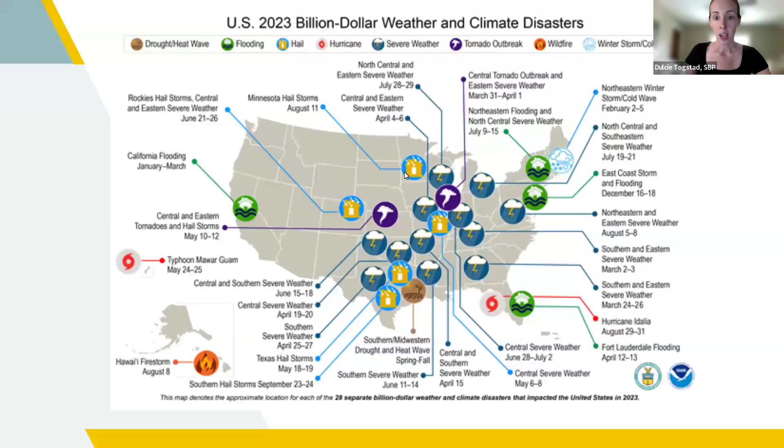I'm going to start by sharing some low cost, low lift tips, and we're going to work our way up as we go through the presentation to tips that are going to be a little bit more involved and more costly considerations. So the first tip is I'm going to arm you with what it takes to inspect your roof.

Inspecting your roof should be something you take action on regularly, say once a year. By regularly inspecting your roof, you are more than likely to catch issues before they actually become larger issues and, in turn, more costly concerns.

So when inspecting your roof, here are some signs of potential issue to look for. The condition of the roof covering: do you have loose shingles? Do you have missing tiles? Do you have rust or discoloration?

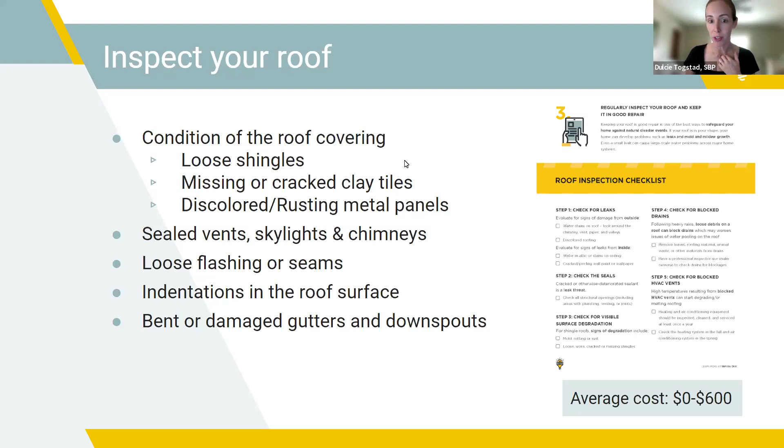Taking a look at your vents, skylights, and chimneys — are those areas of penetration sealed appropriately? Do you have any other loose flashing or seams along the edges of your roofing? Look for indentations or marks on the roof surface where water could seep through, as well as considering your gutters and downspouts in this inspection.

Depending on the elevated height of your home and your individual ability level, this inspection is something you could consider doing on your own, as well as having a professional look at it to assess the condition of it. The cost for that is roughly somewhere between $0 and $600, depending.

SBP has a roof inspection checklist available on our website. I think you should see the link in your chat. That can be used as a resource to help guide you through doing a roof inspection.

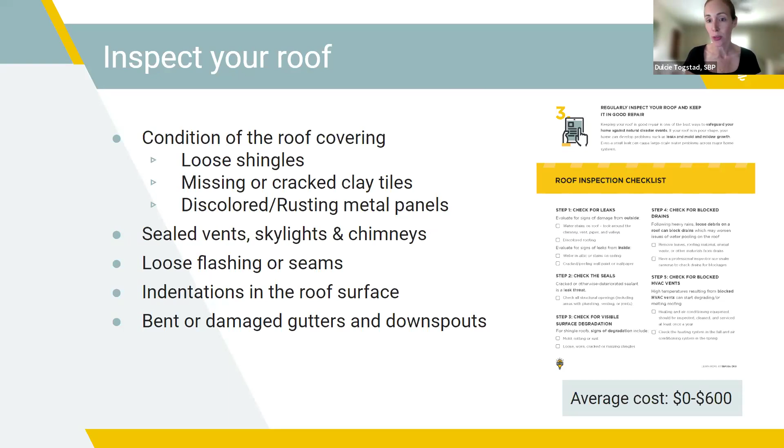If you consider going the route of hiring a professional, make sure you do some due diligence here. Word of mouth is always a good approach to take when hiring a professional, but you still want to make sure that you are diligent in vetting and working with contractors.

So what that means is, all in the spirit of trying to avoid contractor fraud, you want to ensure professionals you're hiring have the appropriate license and insurance and/or are valid to be able to work in whatever state or county you live in.

Take the time to get multiple bids from various professionals to ensure that the pricing seems reasonable. And then read those contracts thoroughly to make sure that you understand it before you sign or offer any payment.

SBP has guides you can use — I believe they're in the chat — as well as short interactive learning modules to guide you through how to avoid contractor fraud.

Moving us to tip number 2: clear limbs and trees from around your roof and home.

Trimming or removing trees is something that should also be done regularly, like inspecting your roof. We should be concerned not only about damaged or dead trees that are very obvious to the eye, but really any tree or limb that could possibly cause harm or damage to your property.

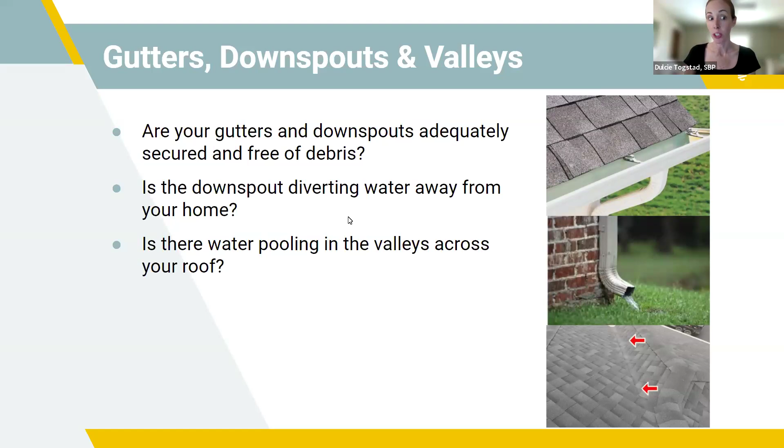The final two tips I'd love for everyone to consider have to do with re-roofing your home. I understand these next two tips may not be actionable for you right now, but when it comes time to put on a new roof, this is knowledge that's going to be handy. Tip number 4 is to consider what options you have for roof types.

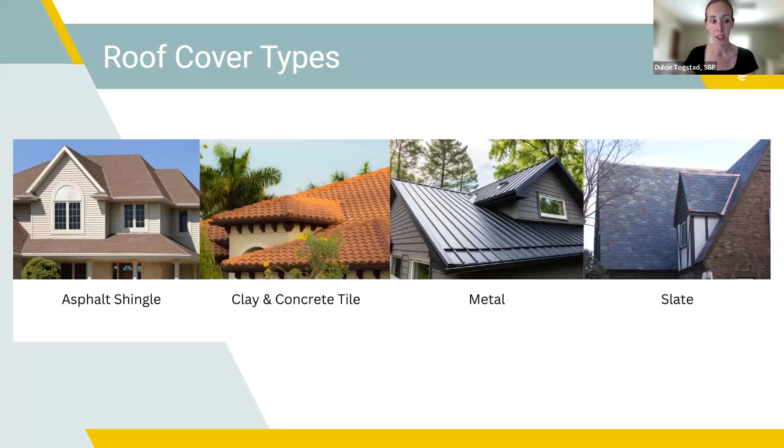If you look around your neighborhood, most of us are going to see asphalt shingles. That's because this type of roof covering is generally the most common around the country, since it's the most affordable, comes in a variety of colors, and is easy to repair. While these shingles typically have a shorter lifespan, they come with an option for a high impact resistant rated shingle, which is valuable - meaning shingles rated as such bring added resiliency in high wind events.

The next roof covering type is clay and concrete tile roofs. While this type of roof covering is a bit more costly and isn't possible on all framing structures, it is extremely durable and requires very, very little maintenance.

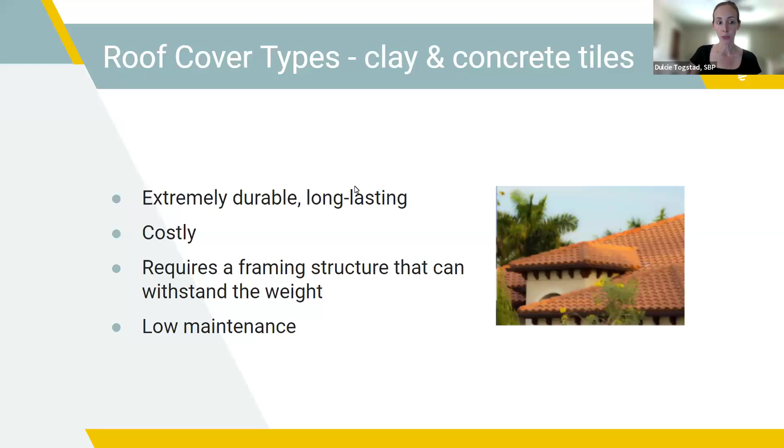The third roof covering is metal roofs. Metal roofs have been growing in popularity because they are the most resilient of all the options and have a very long lifespan. While it's a greater investment than traditional shingles, the investment pays off over time if you consider the longevity of the product, the minimal upkeep needed, and the resiliency, which you sometimes can't put a price tag to.

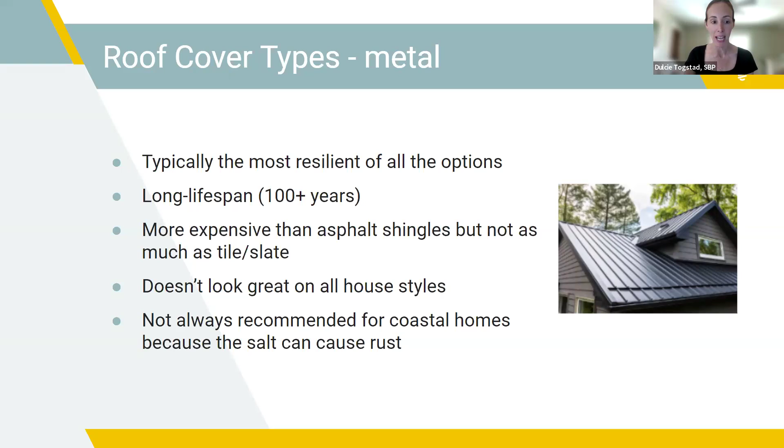The last roof type I want to call out is slate roofs. This is probably the least common we see around the United States, typically due to installation cost barriers, but overall it is a fairly durable material. Ultimately, a well-built, well-maintained roof is what's most important. But if added resilience is important to you, considering different options for roof covering materials is something to keep in mind when taking on a home renovation.

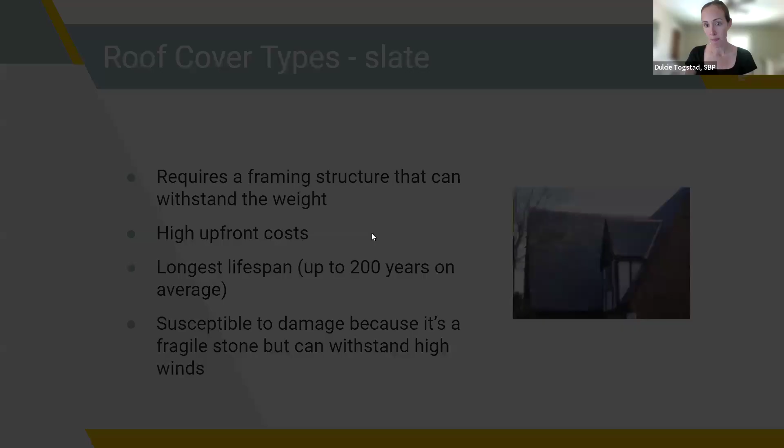The final tip, number 5, that I'll leave you with is to consider re-roofing your home to meet the Institute for Business and Home Safety's Fortified standards. I understand this tip may not be actionable for you right now, but it's handy knowledge to keep in mind down the road if a new roof is something you have to take on.

Fortified is a voluntary construction and re-roofing program designed to strengthen homes as well as commercial buildings against specific types of severe weather, such as high winds, hail, hurricanes, and even tornadoes. This method was developed by the Institute for Business and Home Safety, or IBHS, after conducting extensive field research of real homes after real storms.

And so what they do is identify common construction weaknesses, and they test solutions in a research center that is capable of subjecting full-scale homes to realistic storm conditions—wind-driven rain, hail, and high wind speeds.

A little bit of a story here: SBP had firsthand experience with the peace of mind that a fortified roof brings. After Hurricane Ida, which made landfall in Louisiana in 2021 as a Category 4 storm, our clients who lived in properties we have as affordable rental units had minimal damage, maybe a few shingles missing here and there. This meant that these residents, all who identify as low to moderate income families, were not displaced from their homes, while many of their neighbors were. So it's really seeing the benefit that a fortified roof has on those who live in a home with one.

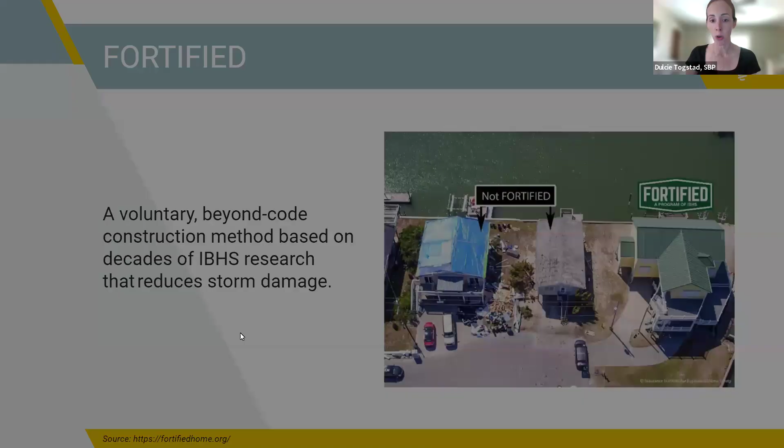Next slide: there are 4 key pieces of what makes a fortified roof different from other roofs typically built to building code. As you can see on the slide, it means there's stronger edges, a sealed roof deck attached more thoroughly with a very specific type of nailing pattern, and then there's also added installation features to consider if you live in a hail-prone area.

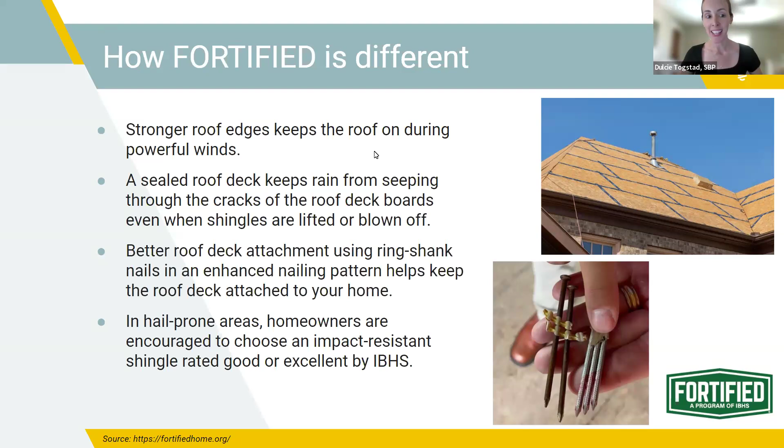Next slide: once you're ready to re-roof your home to a fortified standard, there are 4 critical steps along the path. First is building a team—working with a builder who knows the standard, which gives you the security that upgrades are installed correctly, as well as selecting a fortified evaluator who has been trained in the program requirements and will work with you and your builder to ensure the process is smooth. Once you have a team in place, you can start construction. Throughout that process, the evaluator will collect documentation and verify that the standards are met, as well as submit that verification to IBHS so that ultimately an IBHS fortified designation can be offered, determining that the standard has been met for your roof.

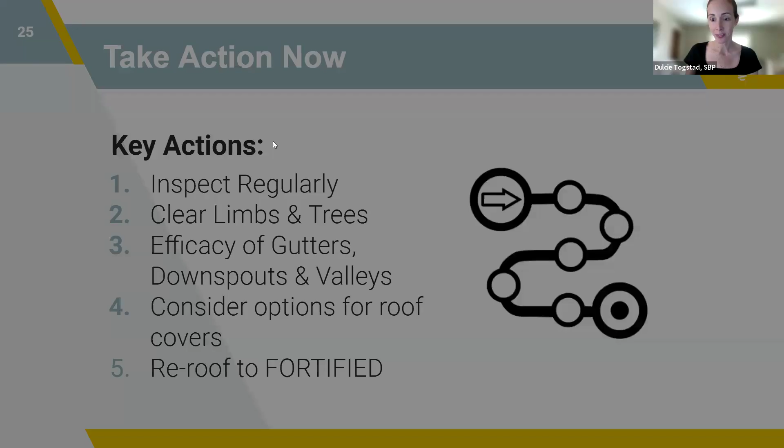Dulcie, as a starting question, we just talked a lot about fortified at the end there. Can you share a little bit more about what insurance specifically folks might get discounts for if they have a fortified roof? Is that a homeowner's insurance policy or flood insurance?

Yeah, great question—the kind of mystery of insurance, I'm sure many of us experience. But fortified protection would be something that your homeowner's insurance would look at offering discounts on potentially. So you'd want to go to your homeowner's insurance company, that particular agent, as opposed to your flood insurance, to see if those discounts are available to you. Thanks, Dulcie.

Now that's a common challenge, I think, because folks get confused on what different insurance covers what, and any wind damage would be under your homeowner's insurance policy. So that's where you could see the discount for investing in this mitigation measure.

Again, folks, please feel free to put any questions you have in the chat. What advice would you give, Dulcie, to a homeowner who has perhaps an older home where they'd like to put on a more durable roof, whether it's slate or investing in fortified standards, but they have concerns about some of the integrity of the home? Is it possible to consider some of these longer term solutions, or are there some challenges they need to think about or be asking questions of their contractor on?